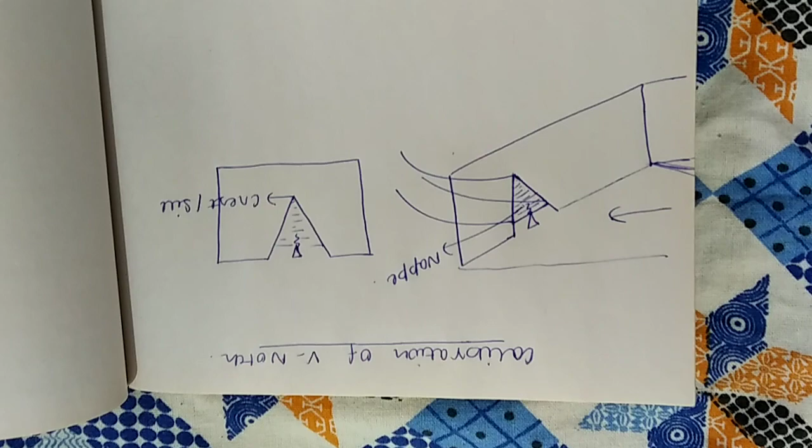Good morning everyone. In this video, I am trying to explain an experiment of fluid mechanics lab, that is calibration of V-notch. Due to lockdown, we are not having our regular labs, so we'll conduct this experiment on virtual lab, but before that I thought I'll explain the basics behind this experiment.

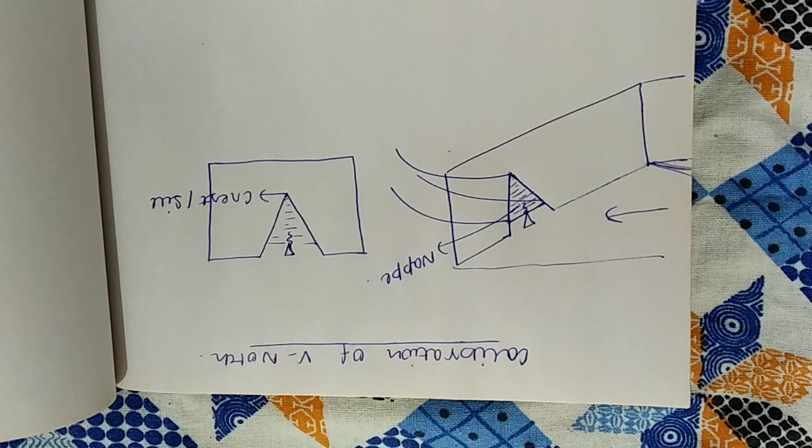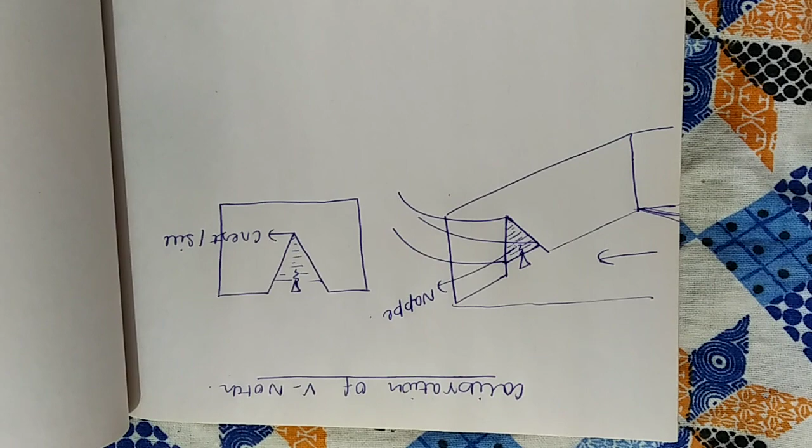This experiment is about calibration of V-notch. Notches are nothing but flow measuring devices in open channel. So notches or weirs are the flow measuring device for open channel flow, whereas rotameter, venturimeter, orifice meter we have already used to measure the flow rate in closed pipes. That is the difference between these flow measuring devices.

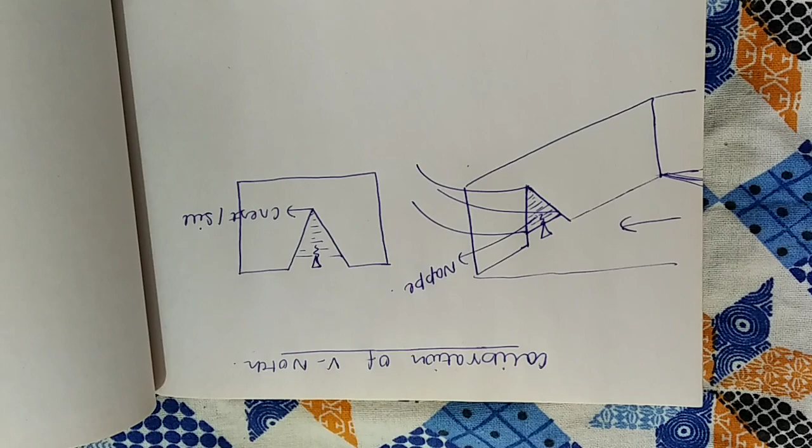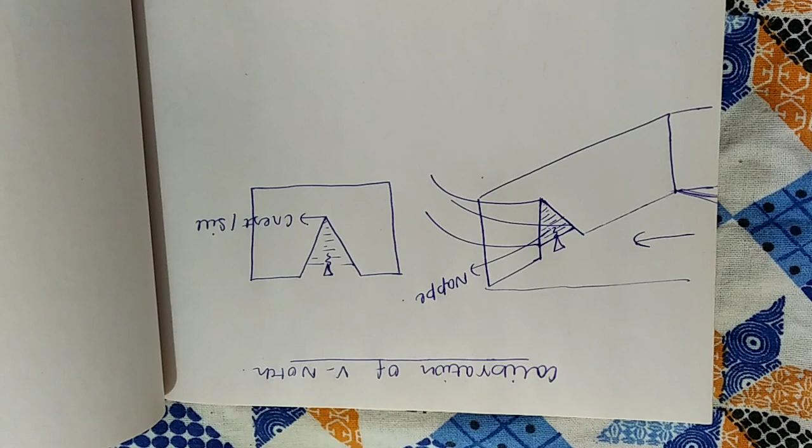Now coming to notches and weirs, there is one difference between both of them. Notch is generally made of a metallic plate, whereas weir is a masonry structure. Both are nothing but an opening in the channel, and they are used to obstruct the flow, and through that particular opening we will be measuring the flow rate.

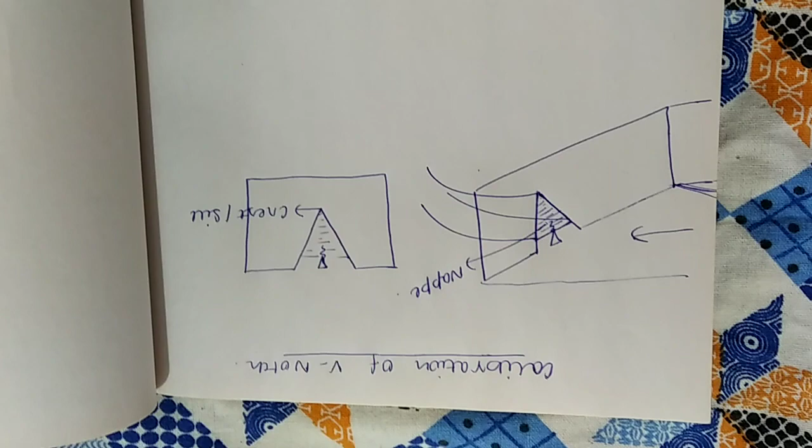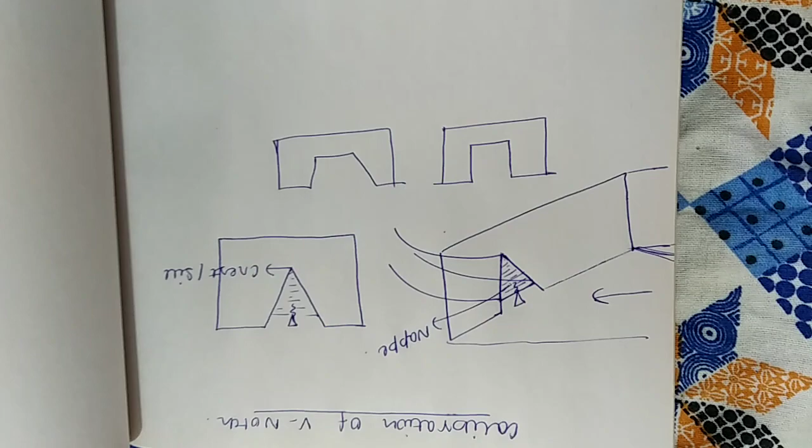Now depending on the shape, we have different types of notches. For example, we have V-shaped notch here, or a triangular notch also we call it, and then we have something like this, that is a rectangular notch. We also have trapezoidal notches.

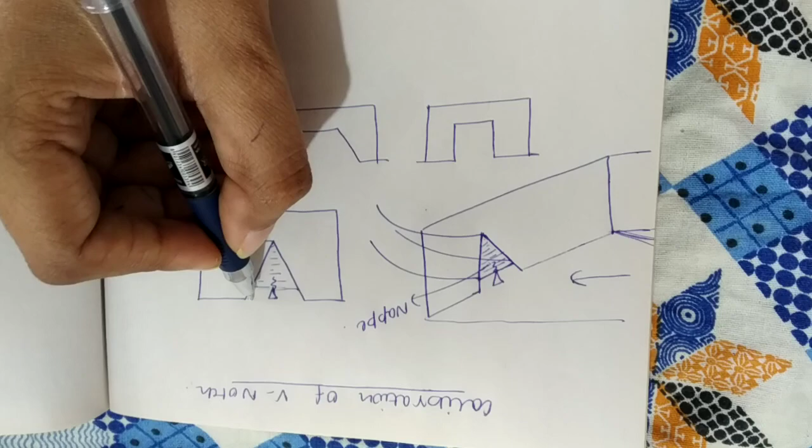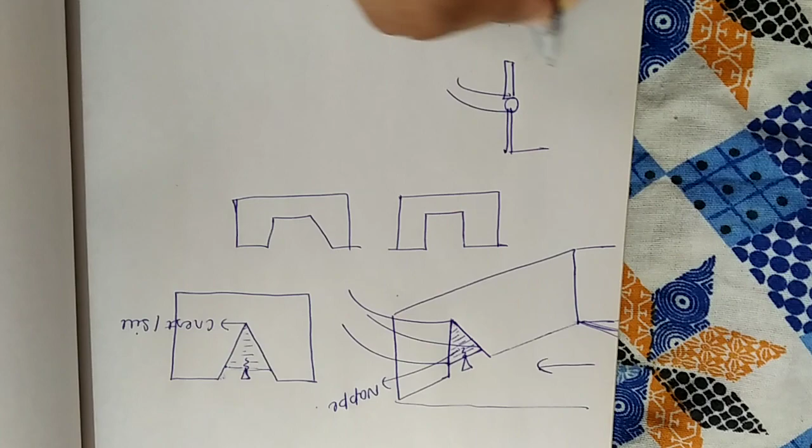So they are nothing but an opening given in a channel, and also this opening is given in such a way that the fluid flowing, the water level is always below the top edge of the notch. Whereas if you remember an orifice, water flows through the entire area of this orifice. But for a notch, it will not touch the top edge of the notch.

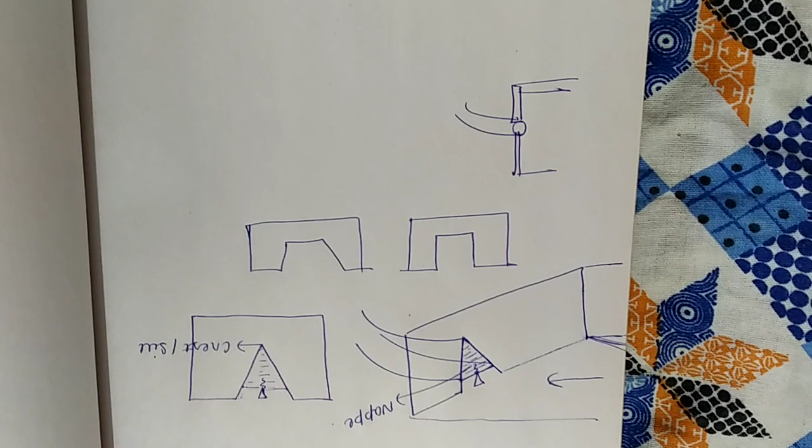So this is one point. Another difference between notch and weir is, notches are basically used to measure the discharge where it is low. So to measure the low discharges accurately, we use notch. To measure high discharges, we use weir.

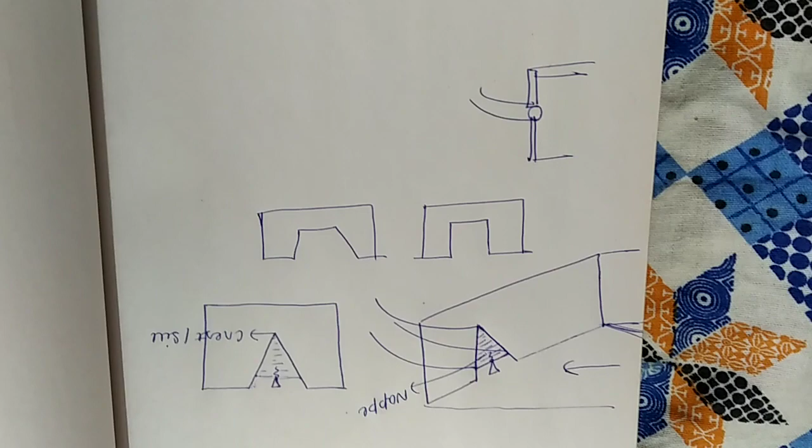So in this video, I'll tell you how are we going to measure the discharge through V-notch, and then we'll calibrate it, which is nothing but we'll try to find out how accurate it is to the actual value with the help of coefficient of discharge.

These devices are used to measure the discharge in open channel flow. So open channel flow and pipe flow, one difference is there. In open channel flow, fluid is always subjected to atmospheric pressure, whereas in pipe flow, it is under pressure. In open channel, it is subjected to the atmosphere.

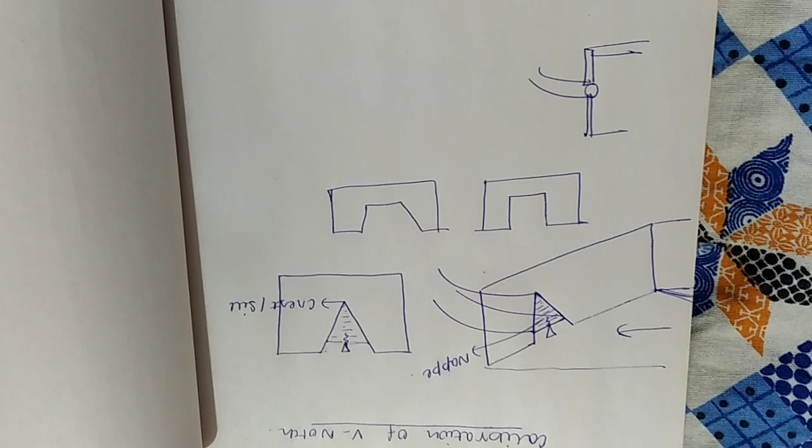Example of open channel flow is canal or flow through a stream. In those cases, whenever we have to measure the discharge, we use these notches. So they find an application there.

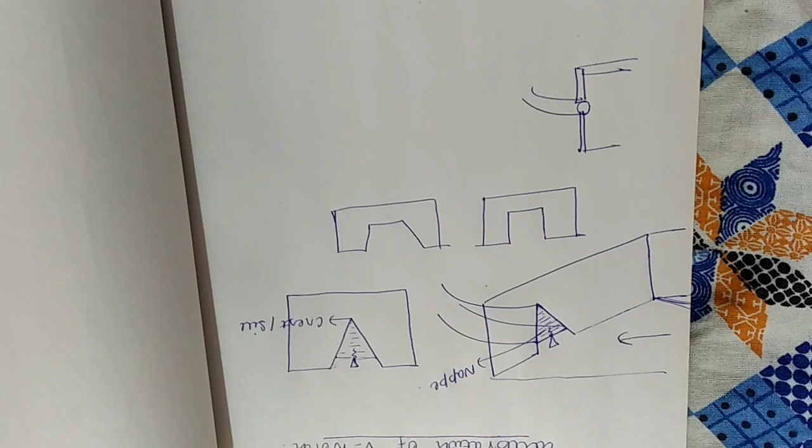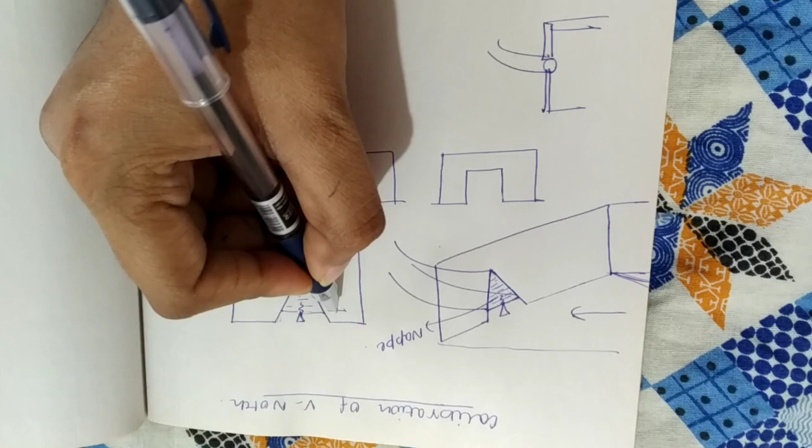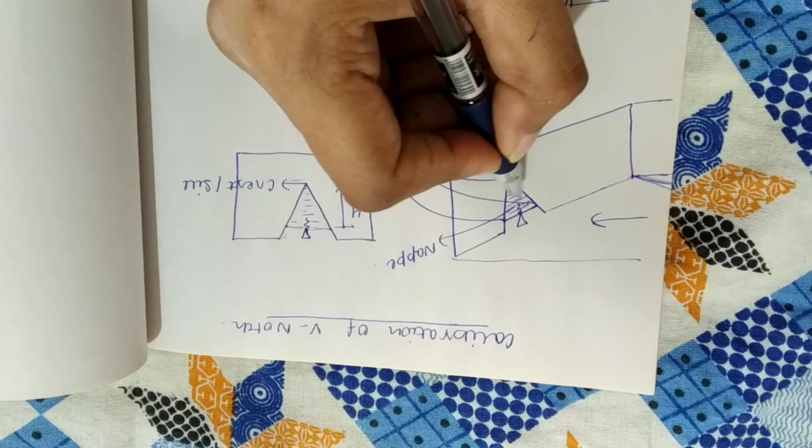Now here, if you see, the bed level of this notch is called as crest, whereas the height of water above this crest is called, suppose I denote it by capital H, this is head over the crest. These are some terminologies associated with the notches. The sheet of water which is flowing over this notch is called nappe.

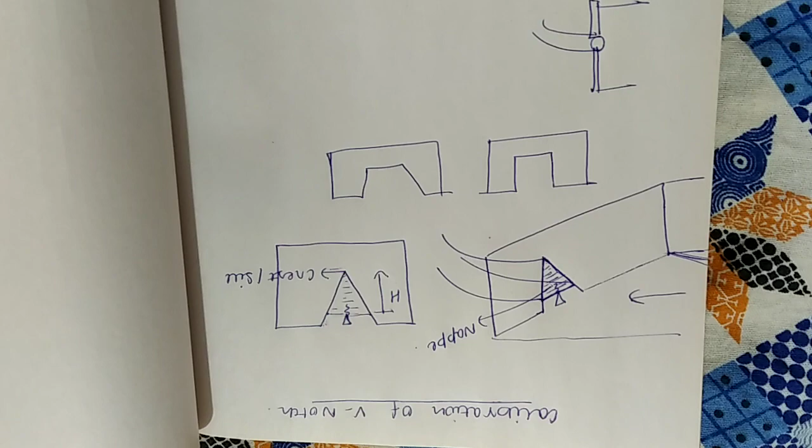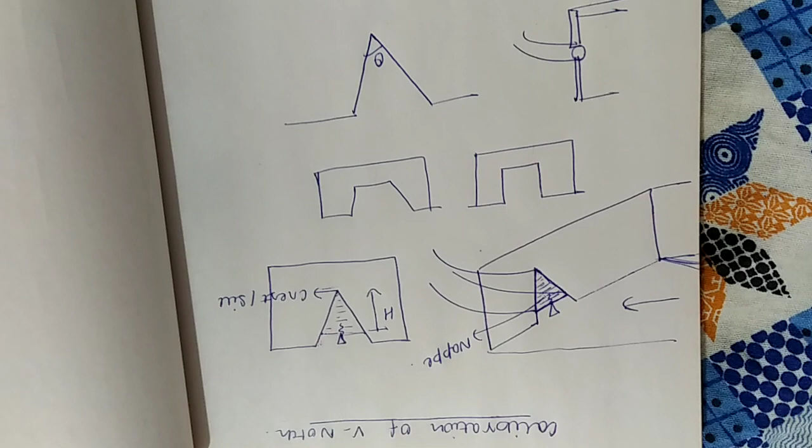Now we will see how do we measure the discharge through this V-notch. So suppose we have a V-notch here of angle theta. Why V-notch here? Basically, among all the shapes, V-notch is the easiest one and it is the most accurate one. So we use that more in practice.

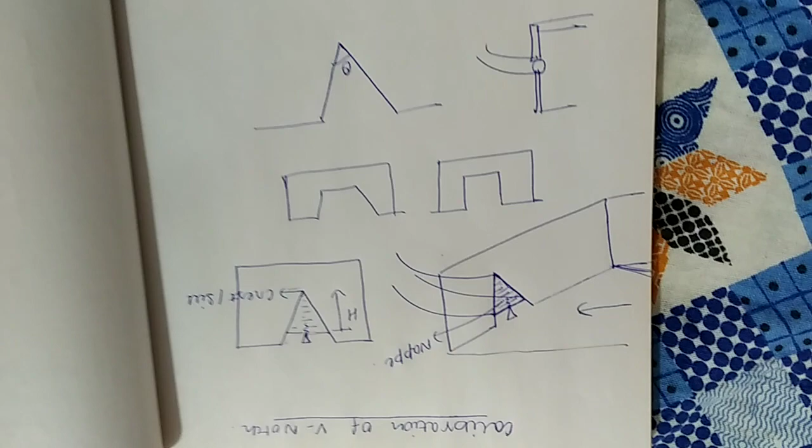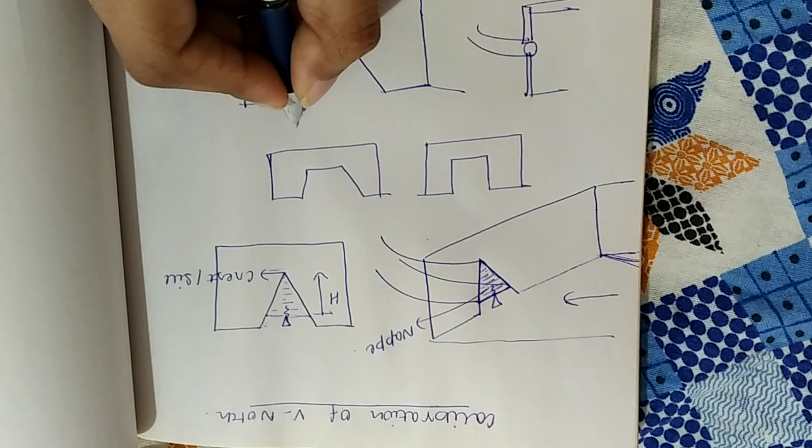So here theta is the angle between the notch. I have kept this metallic plate as an obstruction to my flow in a tank or in a channel. Now water will flow only through this area. So again the principle remains same: the cross-sectional area and the velocity will give you the discharge.

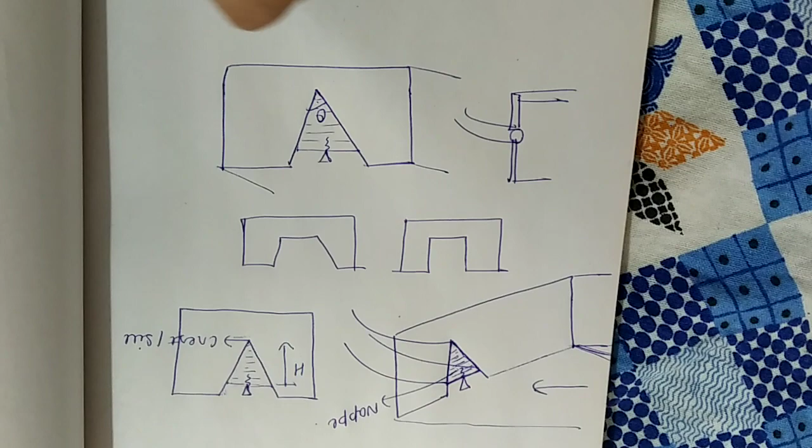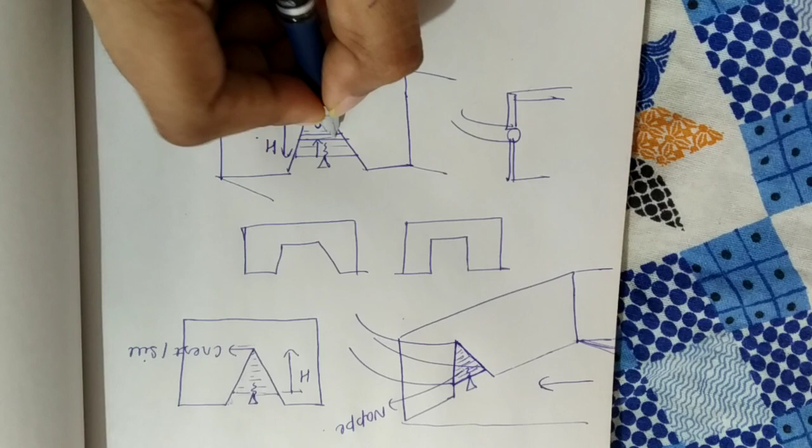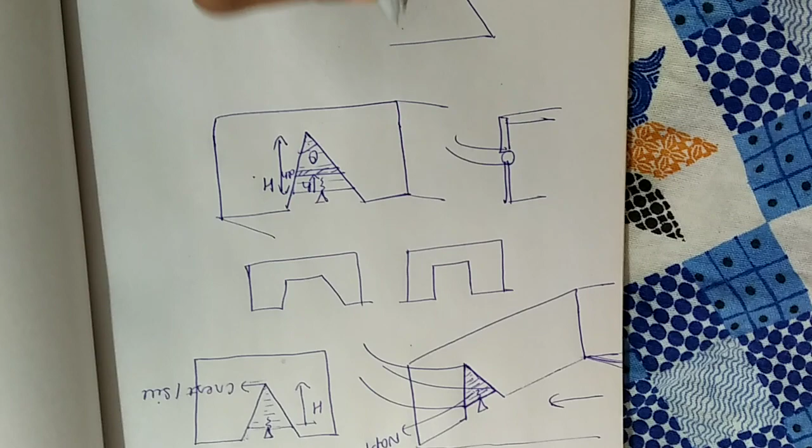So here I am assuming this height as capital H. I take a small strip of dH width at H height below the top surface. If I try to draw it here, remember the water level is always below the top edge.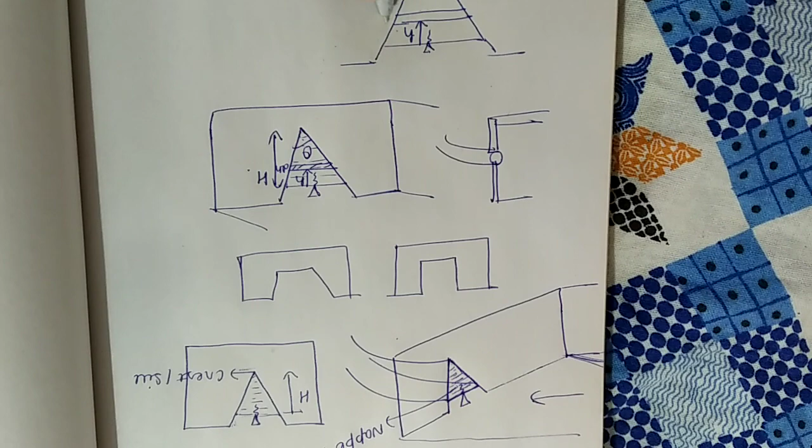So I have taken at an H depth a strip of dh thickness. Theta is the angle. If I draw the axis, this is my theta by 2, that is half the angle of the notch. And the total height is capital H above the crest. This is the crest.

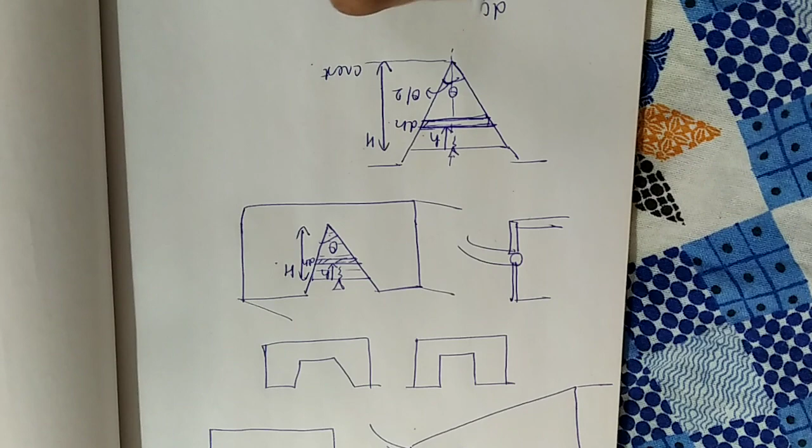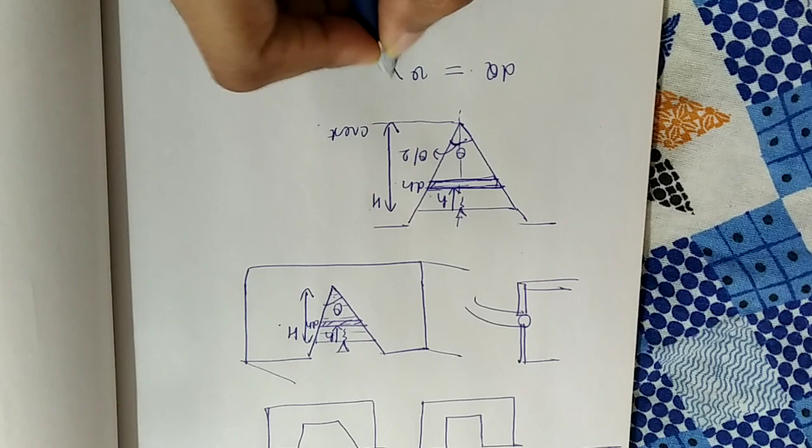So again, if I want to find the discharge or the elementary discharge through this elementary width or elementary area, what will be my discharge? I denote it by dq. So dq is the discharge flowing through this elementary area. It will be velocity through this elementary area into the area of this strip. Discharge is nothing but cross-sectional area into velocity of the fluid flowing through that area.

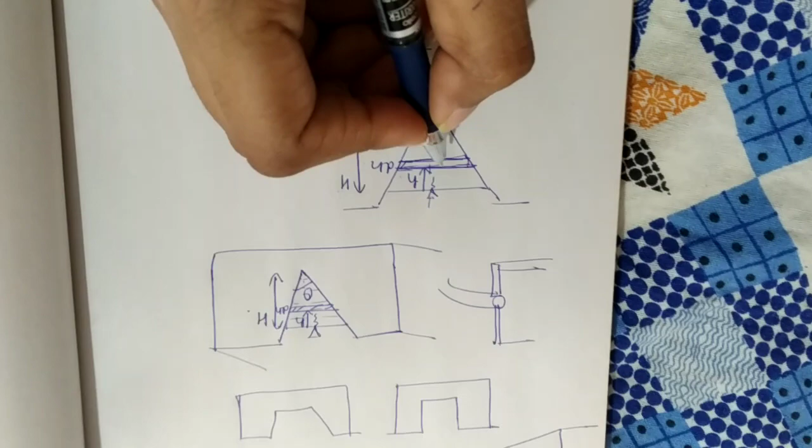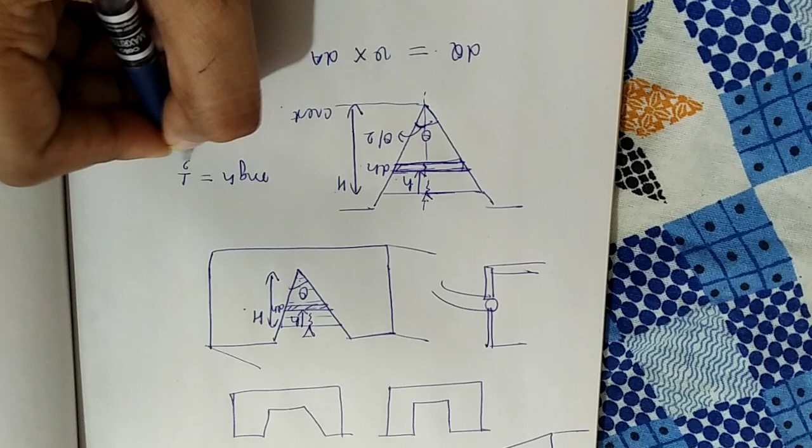So again here, what will be my velocity? The potential energy of this water is being converted into kinetic energy. So if I equate mgh equals to half mv square, I'll get the velocity at h height below as root 2gh. So I'll substitute it.

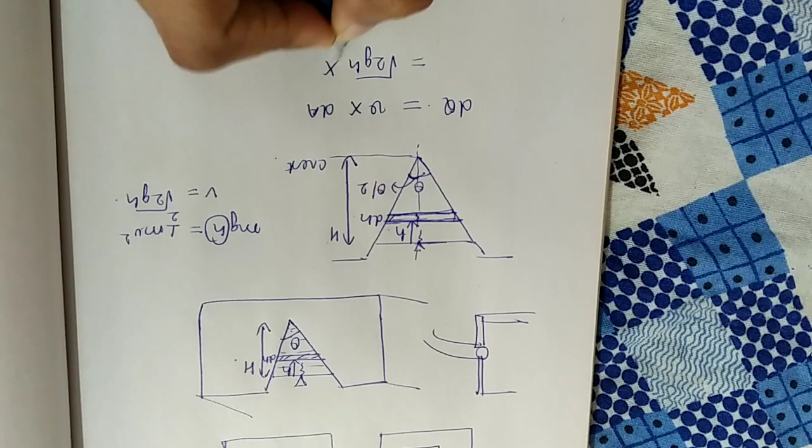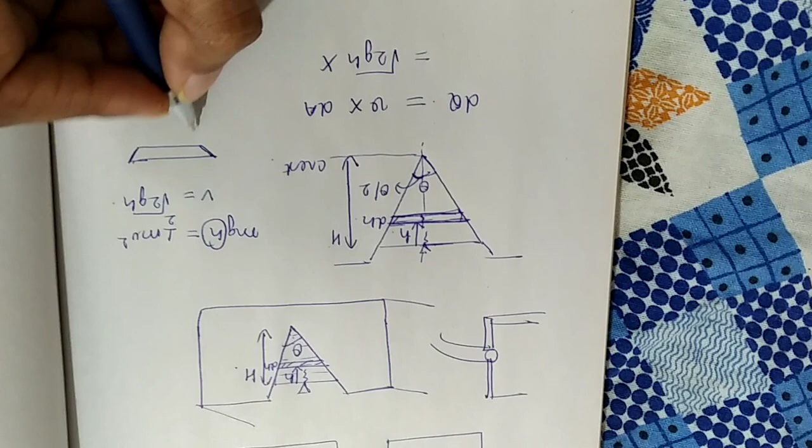And then what will be my area? So area will be, this is an elementary strip. Now considering this theta angle to be very small, I can approximate it as a rectangle of height dh and width, let's say 2b. Now how will I find this 2b?

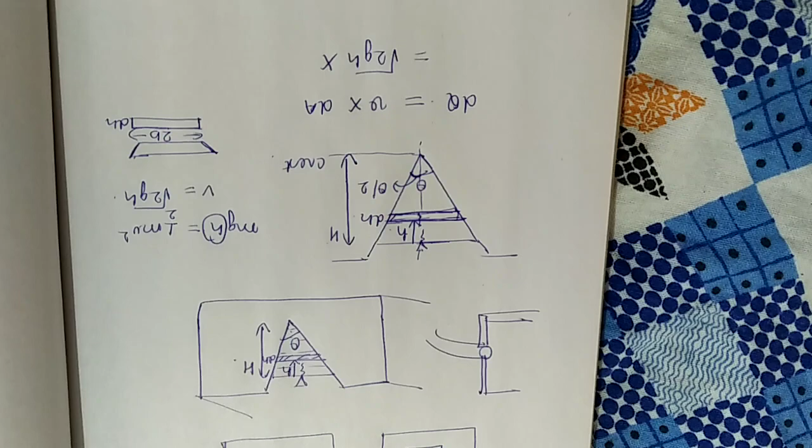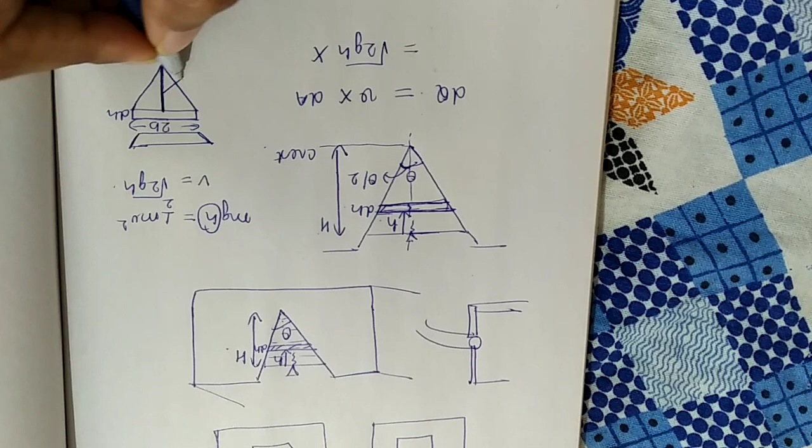If you think of it, so at h height below, this height I'll get as H minus h. So in this what I'm trying to say is I want to know this width. So for that, this theta by 2 is the angle. This is H minus h. By using the right angle triangle, I can get it as,

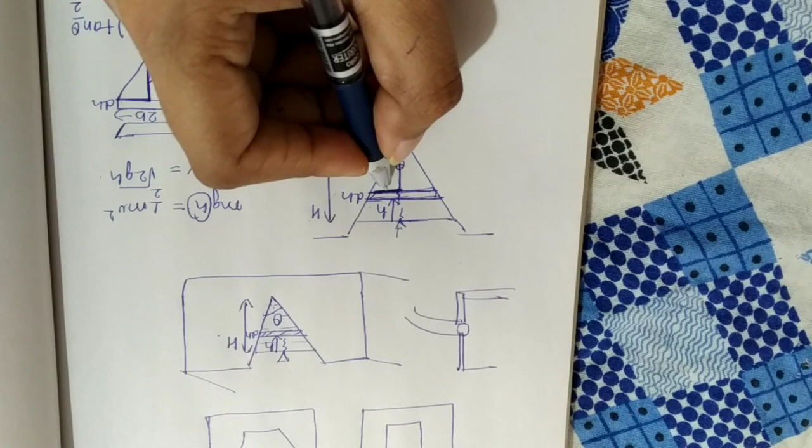I can get this width as H minus h into tan theta by 2. Why? Because tan theta by 2 will be this by this. This is H minus h. Capital H is the height above the crest. Small h is the height at which I am taking this strip.

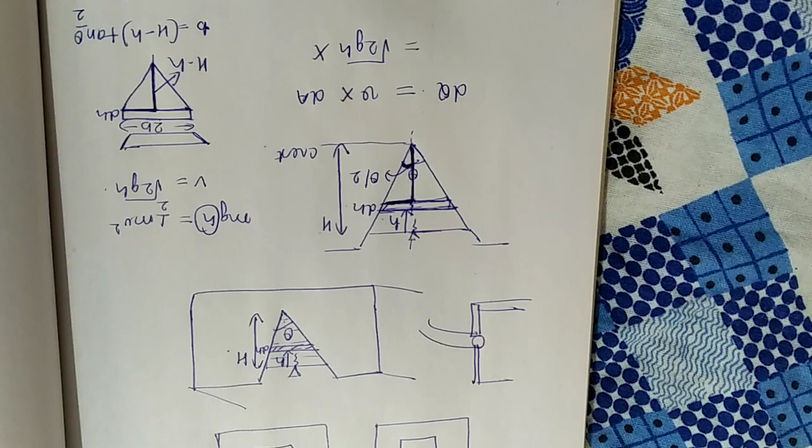So I'll get the area as, now this is a rectangle, so I'll do 2 into this width. I'll get H minus h tan theta by 2. Multiplying it with the velocity, so my dA will become as root 2gh into 2, H minus h tan theta by 2.

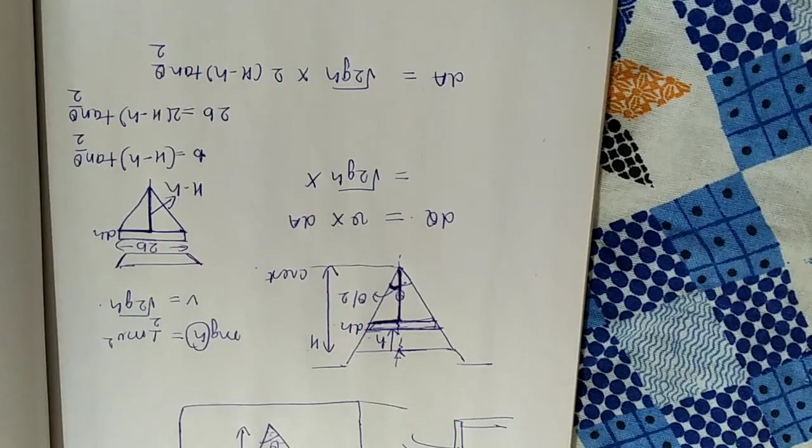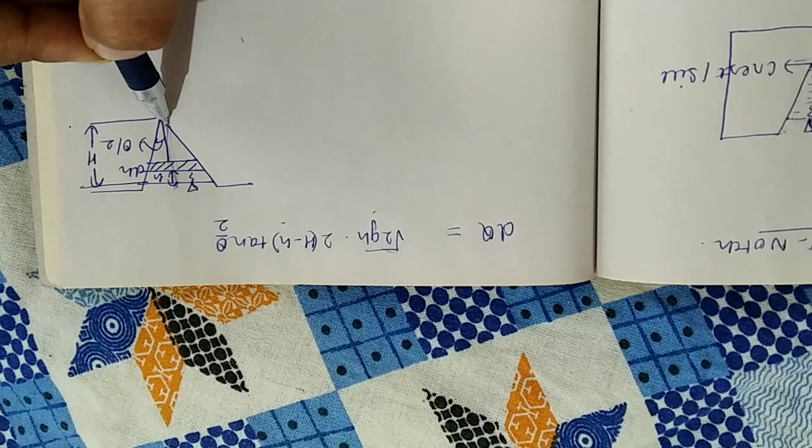So I can write my elementary discharge as velocity into my elementary area. So if I want to integrate it over, if I want to know the total discharge, I have to integrate this height h from 0 to capital H. So I'll get the total discharge by integrating it from 0 to capital H, root 2gh, 2 into H minus h tan theta by 2. So only small h is the variable here.

So after integrating, I'll get it as, so I'll get the discharge as 8 by 15 tan theta by 2 into root 2g into H to the power 5 by 2. So this discharge which I am getting is the theoretical discharge.

Now in the lab what we'll do is, first we'll measure this theoretical discharge. This theta we already know because the notch is made of the material, that metal, what is the angle that I have designed that notch? So I know the angle between that two plates. So this theta angle is known to me, so it is also there. Then root 2g and 8 by 15 will be constant.

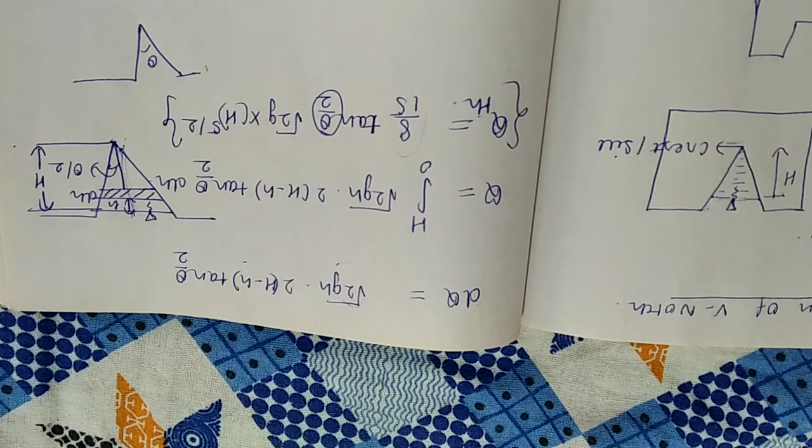Now the only thing that I have to measure is the head above this notch, or head of the water above this crest. Now please note, in the lab, in that setup, we measure this head when the flow is steady. So we allow the water to flow for some time, and then when it becomes steady, we'll measure the head, so that we'll get a constant value. And also one important thing to be noted is we'll never measure head just near to the notch, because at that portion the surface area will be decreasing.

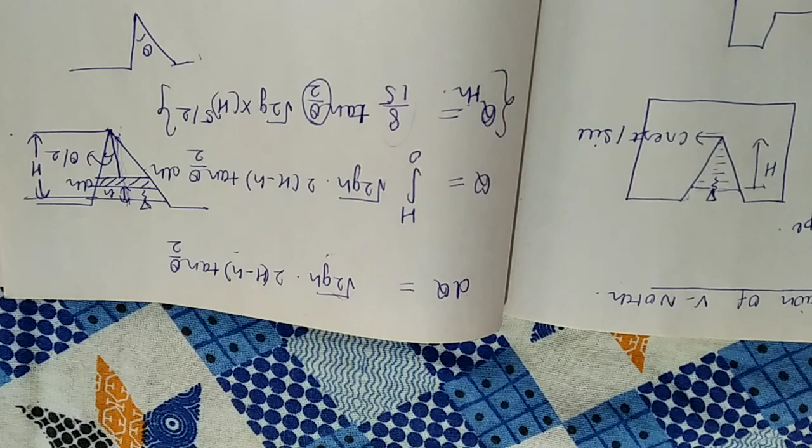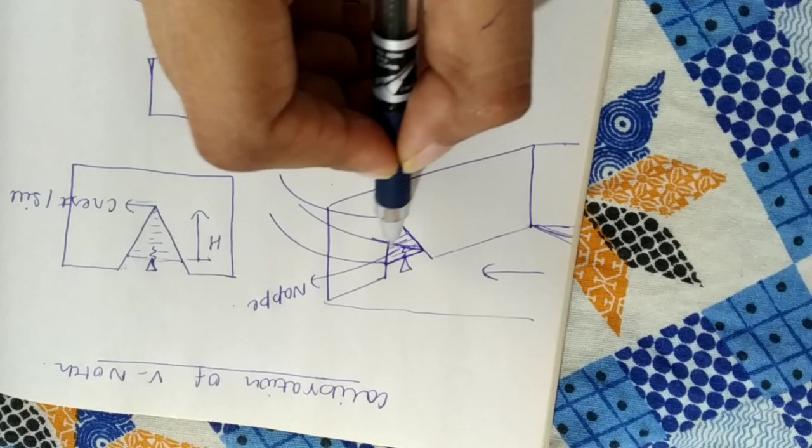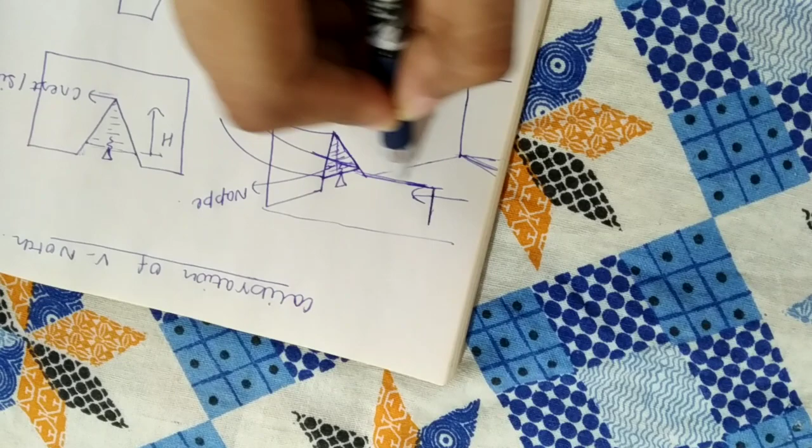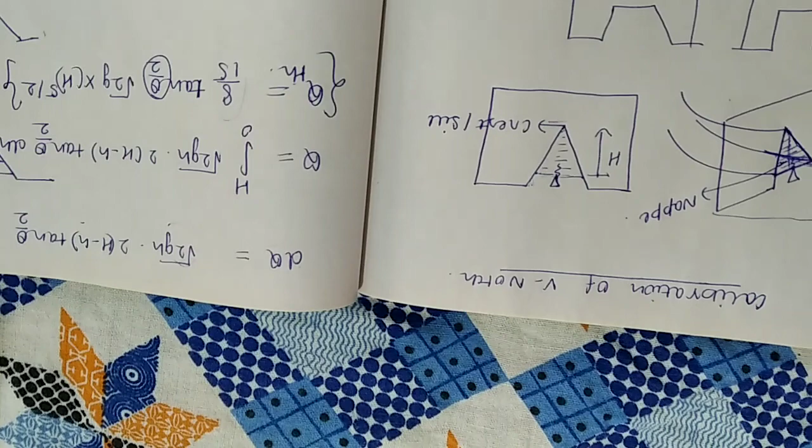Because the surface area will be curved over this notch. If you see here, this area is curved. What I mean to say is I'll not measure the head here. I'll measure the head somewhere around 4 times this distance, somewhere here, because that surface is curved after this. So I should make sure that the head is measured at a certain distance away from the notch, so that we'll measure and we'll get the theoretical discharge.

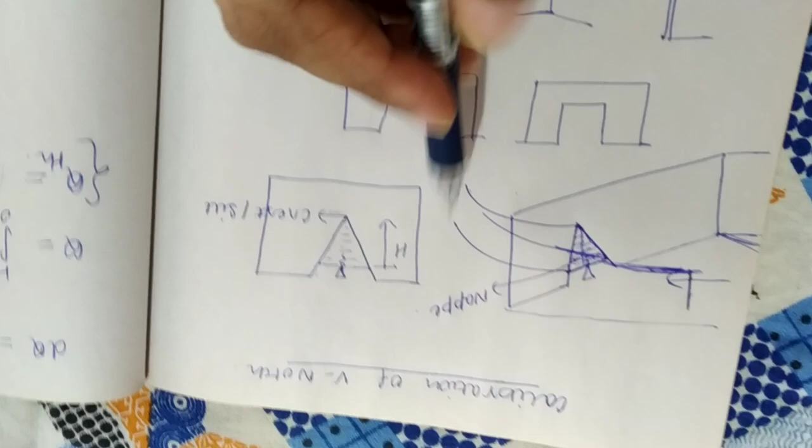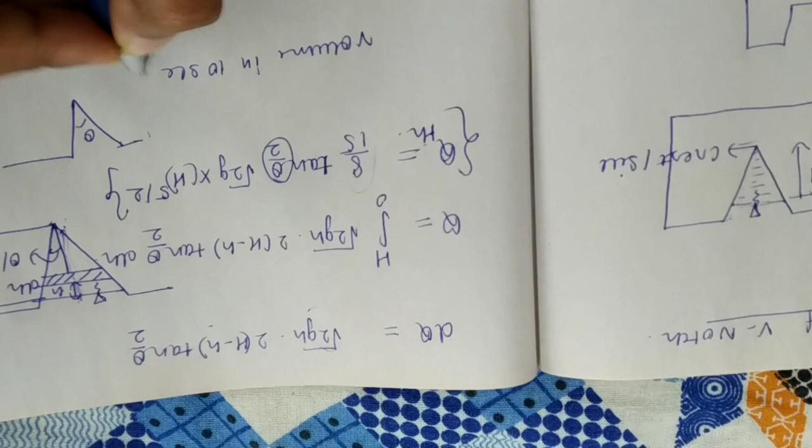Now actual discharge, how will we get? This water is allowed to flow to a collecting tank of which dimensions are already known. So again you will see how much time it is taking for 10 centimeter rise in this tank. So the volume of water that is collected in that time, that you know, some V, say V liters. So that is my actual discharge. How much volume of water is collected in that time, that will be my actual discharge.

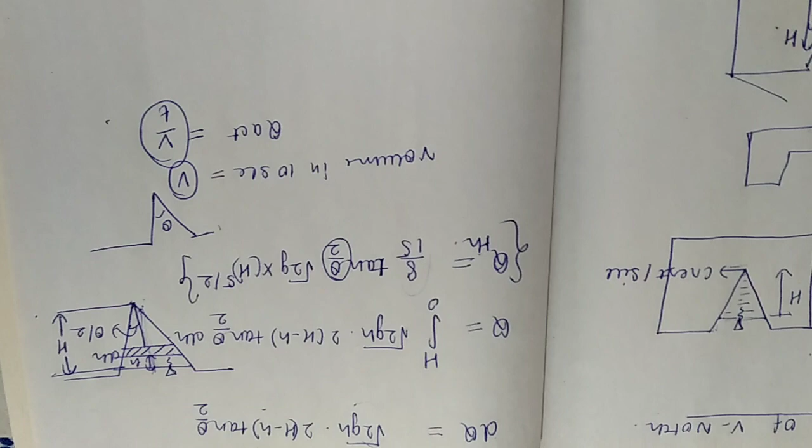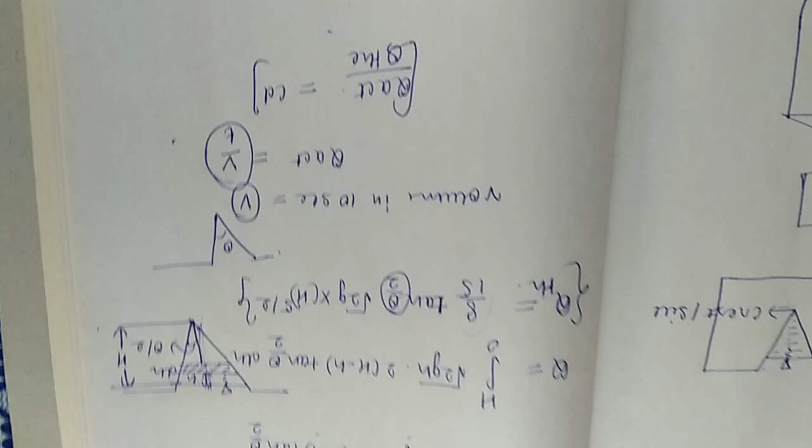I'll compare this actual discharge and theoretical discharge. I will get my CD value, or the coefficient of discharge. So that will be your calibration of V notch. The more closer the value to actual, the better it is. So actual and theoretical should be as close as possible.

Now this whole basics for the V notch, and then there is one more video in which I would like to show with the help of some pictures so that it will be more clear to you, how flow is happening over the V notch or over the triangular notch or weir, and then it will give a better feel for you. So I hope you guys understood the concept behind this discharge measurement.

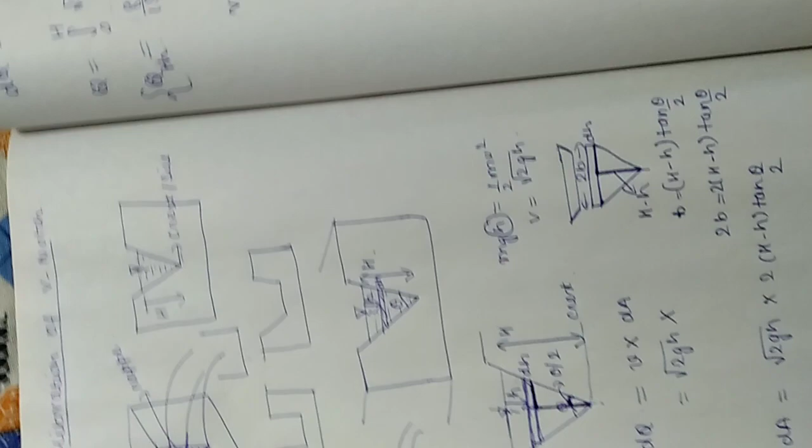The advantage of using the V notch is it gives you accurate discharge when it comes to measuring low discharges. So accurately, whenever we have to measure low discharges, we make use of V notch. Only one reading that you have to take is head over the sill and the actual discharge that you are measuring, so that you can compare both the discharges.